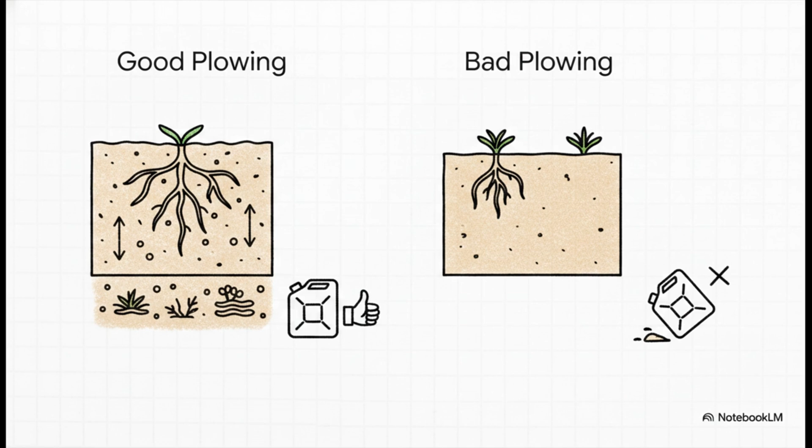Consider what a moldboard plow is actually accomplishing in just a single pass. It's controlling weeds, it's improving soil aeration, and it's resetting the field's moisture exchange for the next operation. If your setup is mismatched or poorly adjusted, you're not just doing a bad job turning dirt, you're actively destroying the soil structure. You're suffocating future root development, and honestly, you're burning expensive diesel for absolutely zero return.

Now, there's a deeply ingrained habit in farming that tells us to drop the plow as low as the tractor can possibly pull it. You might think maximum depth equals maximum yield, right? Well, actually, deeper is not always better. From an engineering standpoint, plowing too deep without a specific crop requirement or an actual compaction reason just wastes diesel and risks damaging your crucial soil structure.

Your depth should be dictated by the specific crop type you're planting, current moisture levels, and whether you actually have a compaction layer that needs breaking. Overworking that soil just increases erosion risk and unnecessarily accelerates wear and tear on your tractor.

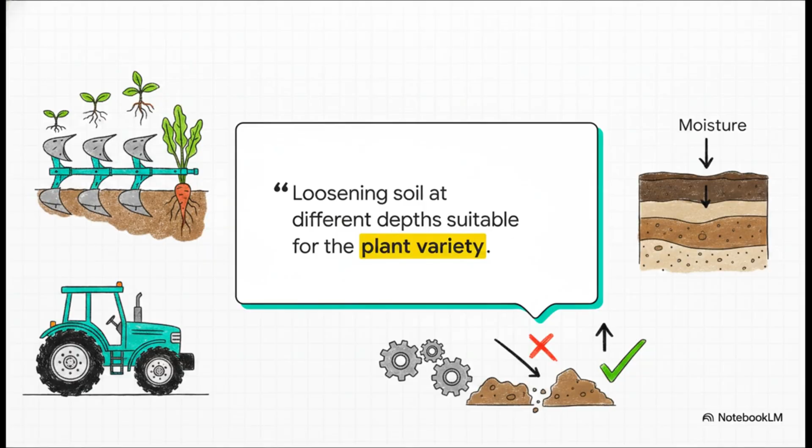Moving on to Section 2, Anatomy and Plow Types. To optimize our fuel and time, we really have to understand the specific engineering of the tools we're pulling. Knowing your hardware is half the battle here. Let's look at the anatomy of a standard moldboard plow. The frame, share, moldboard, and three-point linkage all have to work together perfectly to transfer the immense forces of cutting and lifting back to the tractor.

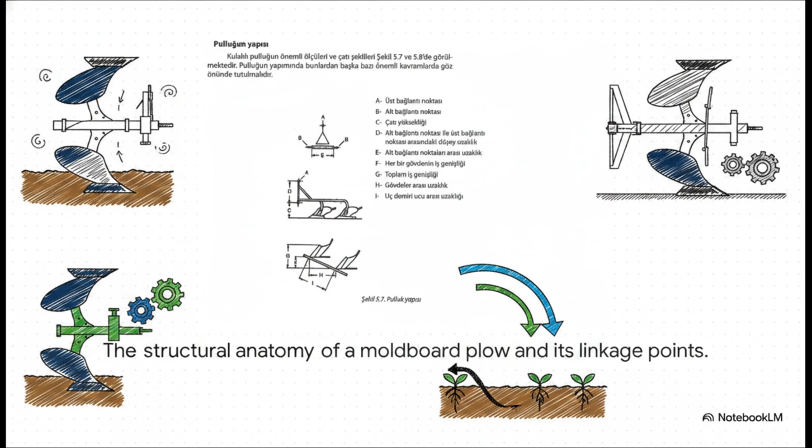The share is your cutting edge. It slices the soil horizontally. Then, the moldboard lifts and inverts that slice. The land side acts as your stabilizer against the furrow wall, and the frog is basically the backbone holding the whole shebang together. The heavy-duty frame is there to ensure the geometry stays true under thousands of pounds of pressure. If the angle of that share or moldboard is off by just a couple of degrees, your tractor is literally fighting the earth instead of gliding through it.

But keep in mind, the absolute best plow heavily depends on your specific soil type. Take the slatted design, for example. If you're working in heavy, wet clay, a solid moldboard creates this massive suction effect. The soil sticks, the plow drags, and suddenly your wheel slip goes through the roof. By switching to a slatted design, you break that suction, which saves you massive amounts of tractor pulling power.

Conversely, if you're in rocky or incredibly hard, dry soil, a disc plow might actually be your best bet because it rolls right over obstacles instead of snagging on them. It's all about matching the specific steel to your specific soil.

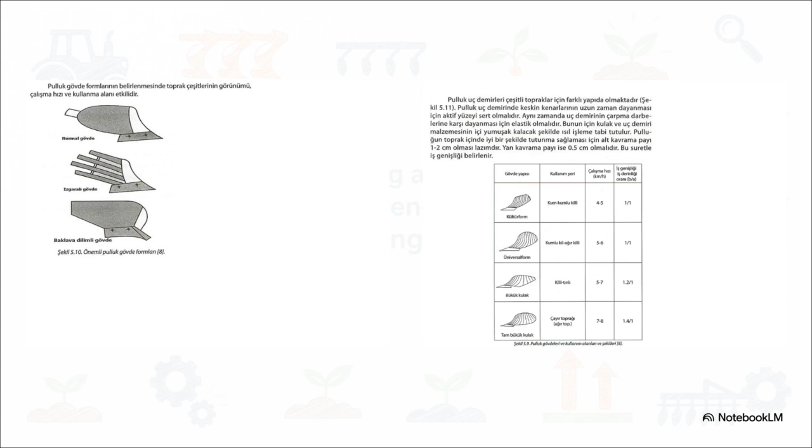And what about when you encounter a severe compaction layer or a hard pan? Well, you shouldn't be using a standard plow at all. That's when you transition to a subsoiler to shatter the subsoil without inverting it. These use narrow points to dive well below the normal plow zone. They lift and fracture the compacted earth, restoring drainage and oxygen flow, which is absolutely vital for deep root growth.

If you try to fix a deep compaction problem with a standard moldboard plow, you're just going to create a new hard pan lower down and likely burn out your transmission trying to pull it.

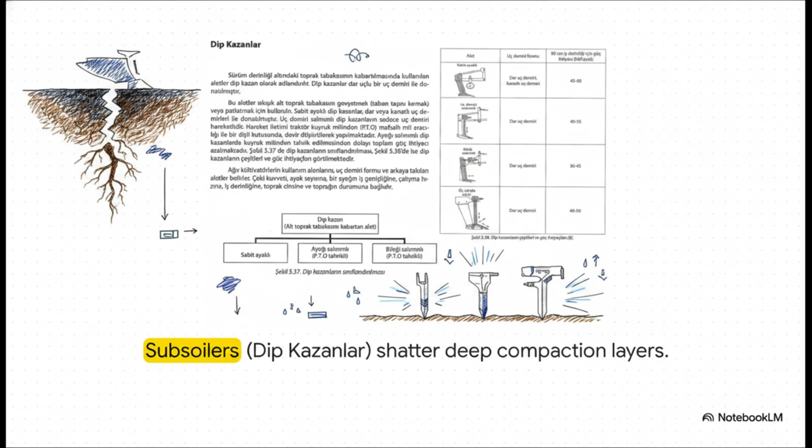Let's roll into Section 3, matching your plow to your tractor. Because having the perfect plow means absolutely nothing if your tractor isn't correctly matched to pull it. When you're sizing your equipment, you've got to remember that raw engine horsepower isn't what pulls the plow through tough soil. You always have to account for power losses, traction, and the actual power making it to the ground.

A super common mistake is buying a plow that requires 100 horsepower based on your tractor's engine rating, only to get out in the field and find out you actually only have about 80 to 85 usable horsepower after transmission and traction losses. Sizing your plow based on available drawbar or PTO horsepower is literally the only way to ensure you aren't constantly lugging the engine, which leads to poor work quality and definitely shortens your machine's lifespan.

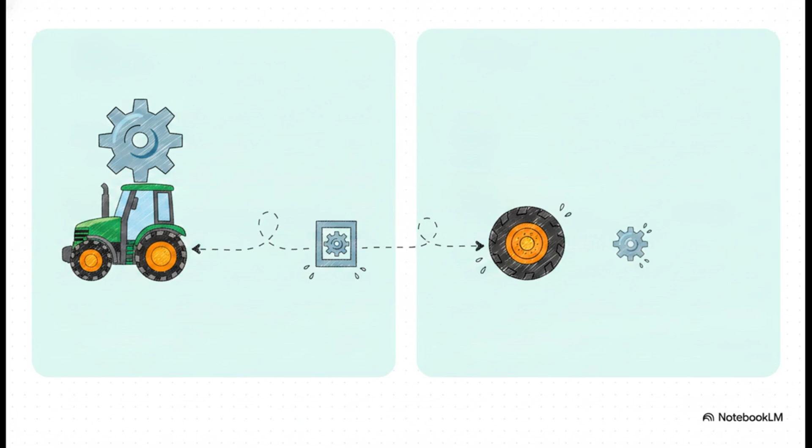Through the three-point linkage, the resistance of the soil actually transfers weight right onto the tractor's rear tires. This means correct ballast and tire grip are just as critical as engine size to prevent excessive, fuel-wasting wheel slip. Plowing is a dynamic system.

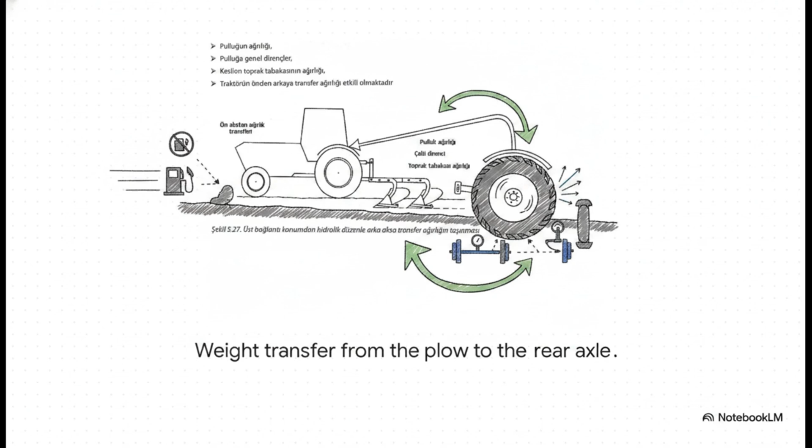As the soil resists the plow, the top link pushes forward against the tractor, dynamically transferring weight down onto that rear axle. If you have the wrong plow size or your top link isn't properly adjusted, you completely lose this weight transfer. Your tires will spin, your fuel gauge will tank, and your forward speed will slow to a crawl. Proper front and rear ballast, along with correct tire pressure, are completely non-negotiable here.

Which brings us to Section 4, Soil Mechanics and Resistance. This is the actual mechanics of the soil itself, acting as the ultimate judge of your tractor's efficiency. You really can't cheat physics. Just think about the specific resistance of the soil and how it jumps drastically based on its composition. Clay soil acts like literal glue against your steel.

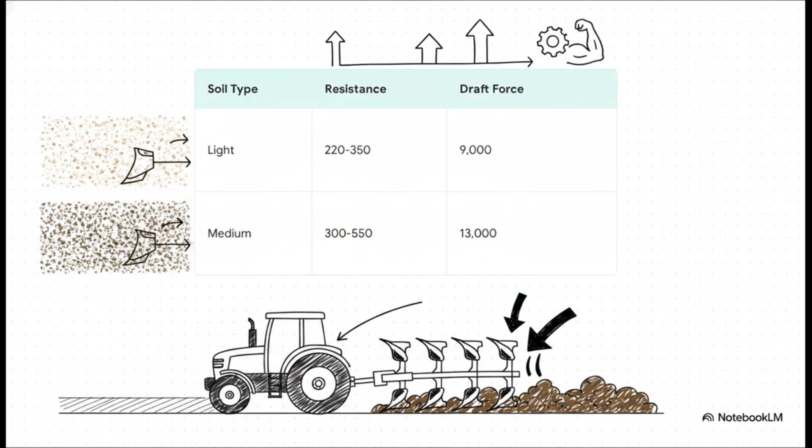If you're plowing light, sandy soil, you're dealing with a specific resistance of around 220 to 350 newtons per square decimeter. But the moment you cross into heavy, wet clay, that resistance can triple or even quadruple. This means the exact same plow set at the exact same depth is going to require exponentially more tractor power just because the soil texture changed.

Hitting a maximum of 1,200 newtons per square decimeter in very heavy clay is no joke. You can clearly see why taking a plow size for sandy loam into a heavy clay field will instantly overload your tractor and destroy your fuel economy.

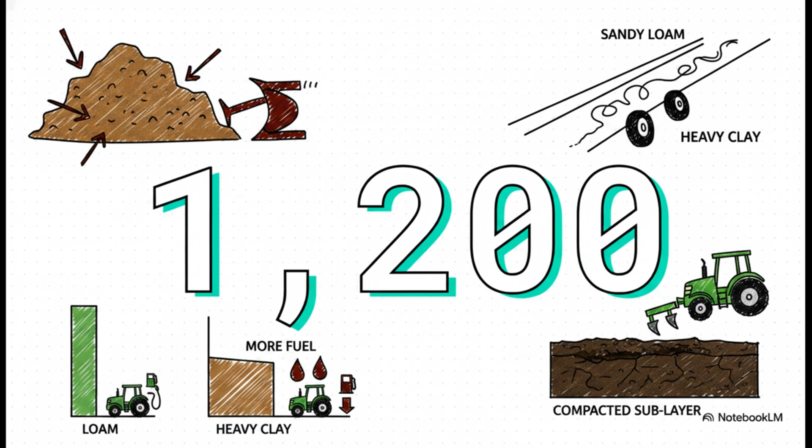This is exactly why we never make absolute claims about fuel consumption or yield increases. A setup that burns 15 liters per hectare in loam might easily burn 30 liters in heavy clay. If you don't adjust your working width, like say by dropping a furrow from your plow when you move into heavy soils, you will induce massive wheel slip, glaze the soil, and severely compact that sublayer.

All right, Section 5, Efficiency, Fuel, and Adjustments. So, how do we mitigate all these forces and actually dial in our efficiency out in the field? It all comes down to meticulous calibration. Getting your setup right requires strict adherence to these adjustment steps. A perfectly leveled plow with the correct top link alignment minimizes soil resistance and ensures even crop emergence.

Transverse leveling, making sure the plow frame is perfectly parallel to the ground while the right tires are in the furrow, is absolutely critical. If your plow leans, your depth is uneven. That means some seeds get planted in deep, wet soil and others in shallow, dry soil.

Next, controlling your working depth and aligning that top link ensures your draft line is straight. When you have a perfectly balanced tractor-plow combo, you can run in a higher gear at lower RPMs. And that right there is the ultimate secret to fuel efficiency.

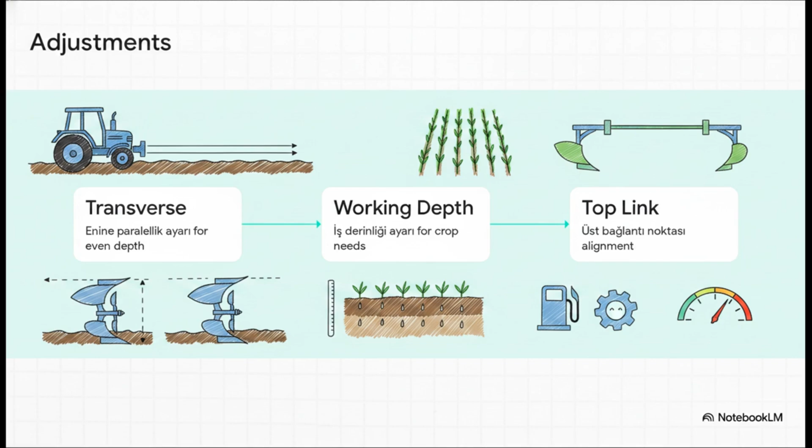Now, we cannot say one method is absolutely better than the other. Your choice between traditional plowing and reduced tillage really has to be an objective calculation based on your specific field moisture, residue levels, and long-term farm goals.

Traditional moldboard plowing is unbeatable if you need a clean slate, especially if you're fighting heavy weed pressure or massive amounts of corn stover. But if preserving soil organic matter and conserving spring moisture are your primary agronomic goals, a reduced tillage approach using chisels or cultivators might be vastly superior. As an engineer, you have to look at the field conditions first and pick the tools second.

Let's wrap things up with Section 6, Avoiding Common Plowing Mistakes. Because even with the best equipment and calculations, human error in the field can still ruin your operational efficiency. These are the true efficiency killers we see on farms all the time. Working in wet soil destroys aeration and causes severe compaction, while excessive wheel slip acts like a hidden tax on your daily fuel budget and machine lifespan.

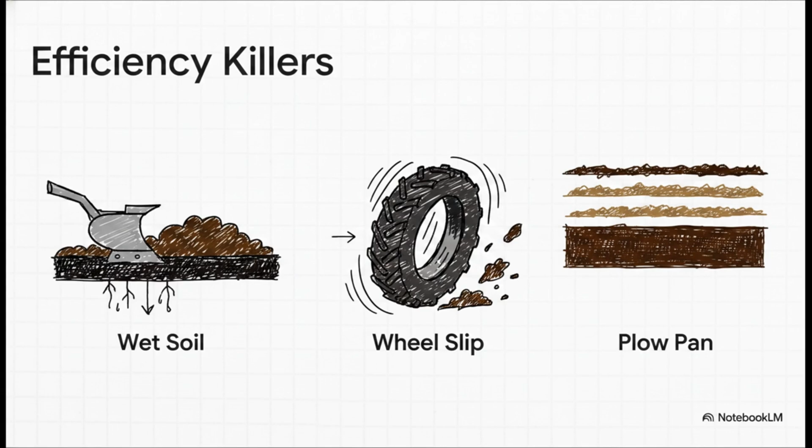Plowing wet soil is perhaps the most destructive habit out there. It smears the furrow bottom, creating a waterproof seal that roots simply cannot penetrate. And using the exact same tillage depth and method year after year practically guarantees the formation of a plow pan. You've got to rotate your tillage practices just like you rotate your crops.

Also, remember that utilizing optional engineering solutions like skimmers can drastically improve residue management, and it doesn't require you to plow deeper or overwork the soil. A skimmer sits right ahead of the main moldboard.

It slices off just the very top layer of soil, where all the weed seeds and tough residues live, and throws it into the bottom of the previous furrow. Then, the main moldboard covers it with clean soil. This gives you phenomenal weed control and residue breakdown, saving you significant fuel and wear.

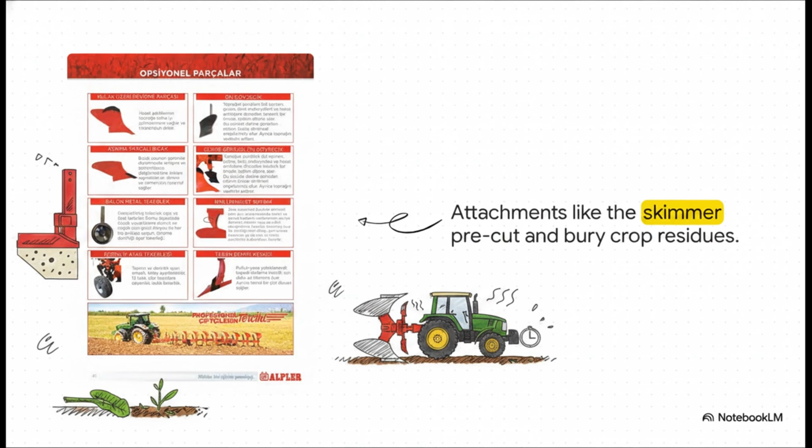So, as we close out this engineering analysis, I want you to think about your own operation. Take a look at your fields, apply these principles, and ask yourself this final question. What is the biggest mistake farmers make when choosing or using a plow? Wrong size, wrong depth, wet soil, too much wheel slip, or poor adjustment? Think about it. And let's keep optimizing our operations for the best possible yield.